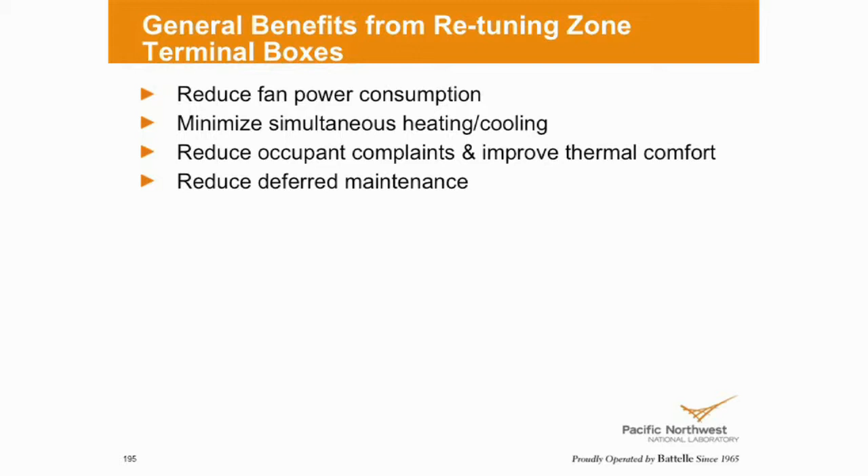So the benefits of retuning the fan power box include: we can reduce the terminal fan power consumption, minimize the simultaneous heating and cooling, reduce the complaints from occupants about the terminal fans noise, and also reduce the maintenance cost. The key condition we want to look at in the charts is the fan power box terminal fan condition. And also we want to look at the terminal box damper position and the reheat valve position.

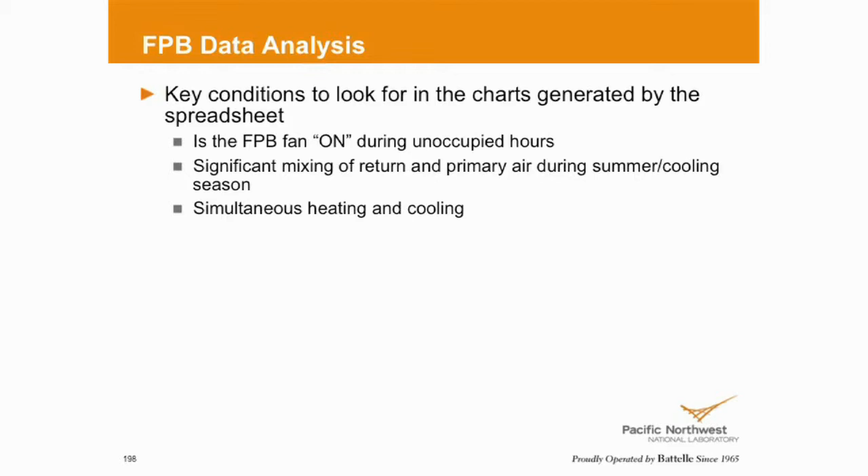Unoccupied setback schedule. So we want to determine if the fan power box fan schedule is interlocked with the air handler fan schedule or not. Like the series fan power box, we want the fan schedule for all the terminal boxes interlocked with the primary fan. So if the air handler is shut off, we want all the terminal fans shut off. Some places we run into terminal fans that run 24/7. They don't have any schedule for that.

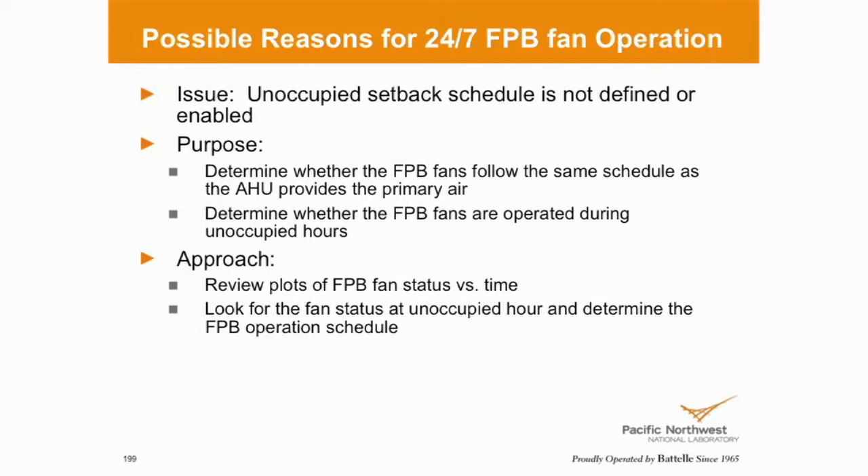So each fan may be quarter horsepower to half horsepower or 3/4, right? So if we add all those terminal fans together, it can be a big number. Some places have hundreds of fan power boxes. That means there can be 75 horsepower for some buildings. So we want to review the plot of fan power box fan status versus time to see if there's a schedule for all those terminal fans.

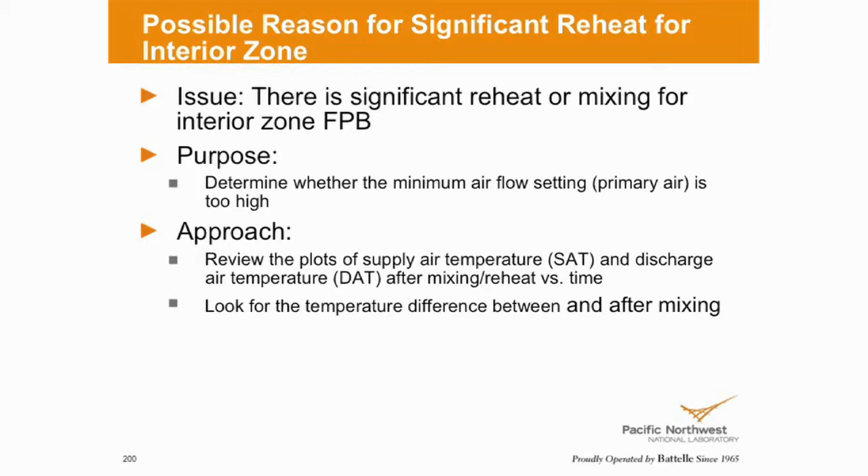Another thing we want to look at is the reheat valve for the fan power box. So we want to determine if the minimum airflow set point is too high or not. Just like we discussed for the normal terminal box, the retuning measures we want to recommend for the fan power box are to define and enable unoccupied setback if possible, and also interlock the terminal fans with air handler control. Reduce box primary minimum airflow based on the ventilation requirements.

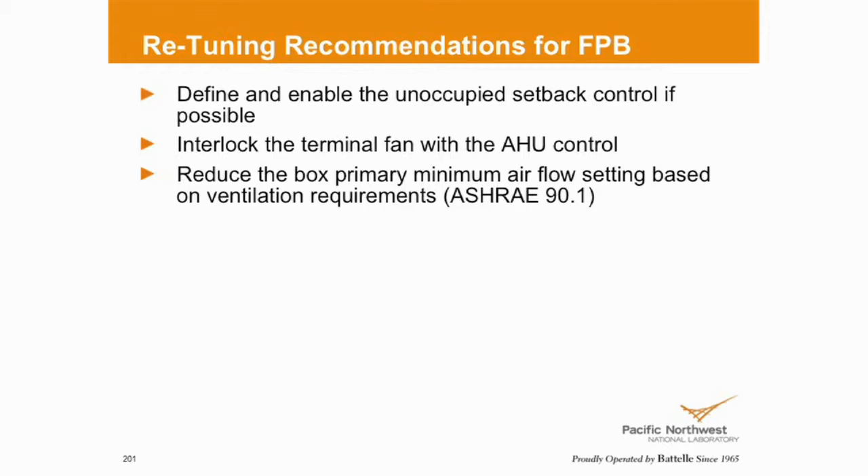Especially the second one, it's very important, especially for those parallel fan power boxes, because we know that you only need those fans running in heating season. So one control measure you can do is, if the ambient temperature is higher than a certain value, let's say 65 degrees, 70 degrees, you can disable all the terminal fans. In that way, you can prevent the fans running during the summertime.

The benefits of doing the fan power box retuning: we can minimize the simultaneous heating and cooling, reduce the fan power box terminal fan consumption, and also improve the thermal comfort and reduce the noise level.

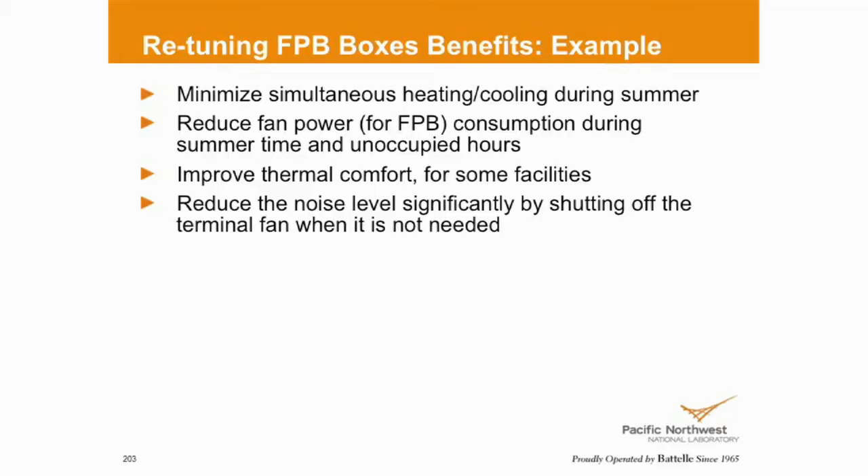If you've got fan-powered boxes, you guys are all doing maintenance, right? Not me. Somebody's looking at them, I hope. Because, again, if we've got issues with filters plugging up, pretty soon the airflow delivery to the spaces is challenged.

We've talked about sensors. Are we calibrating them? Are we validating their location? Filters, coils. Here's more filters and more coils. We think of filters on a rooftop unit, packaged unit, or an air handling unit. But by golly, now the vendor, the engineer, he put in filters on all these packaged terminal boxes. So those are things to be aware of.

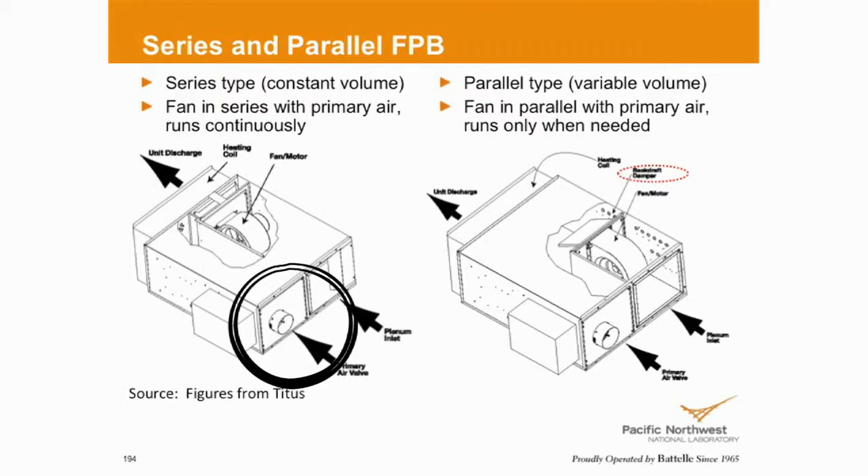Static pressure, I think we said this earlier, but on the series fans, if you go to the vendor websites, most of them will tell you they require about 1/2 inch to 3/4 of an inch at the fan from the primary fan right here, because they've got these big fan motors that are sized to move the air. From this point, they're just taking the tempered air from the primary fan and moving it down the ductwork.

And they are, you'll see we said constant volume. So it's kind of a misnomer. Everyone says, oh, it's a VAV system. So what's varying on these types of boxes is their constant volume to the space. They're varying the amount of air they're taking from the primary fan. These are not true VAV to the space. And they will require less static pressure from the primary fan to operate properly.